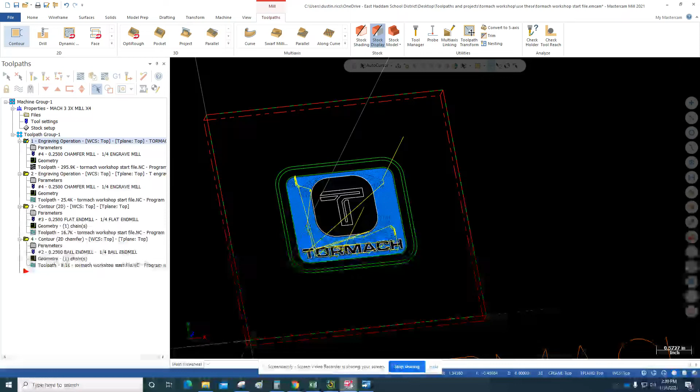All right, so in the first part of this video, we walked you through the four processes for creating the toolpath. Now we're going to show you how to verify it and how to post this file and turn it into an NC format so that we can bring that to the Tormach mill and run this part.

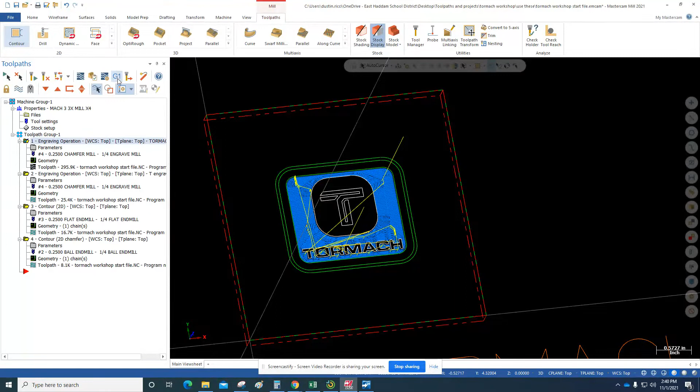Okay, so to verify that it ran correctly, it should cut and view the way that it's supposed to look when it's the finished part. So we're going to click up here where it says Toolpath Group 1. That selects all of our toolpaths, so it's going to verify all four of those. And we're going to go over here to verify our selected operations.

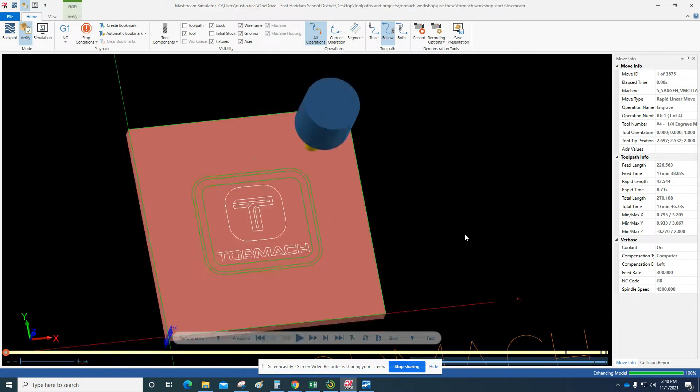By pushing in the middle scroll wheel on your mouse, pushing it straight down like a button, you can orbit this around so you can view it in the best way. And then hit play. You can slow it down a little bit.

So this is going to go through and take us through the engraving operation first. And a small step over here, so it takes a little bit of time.

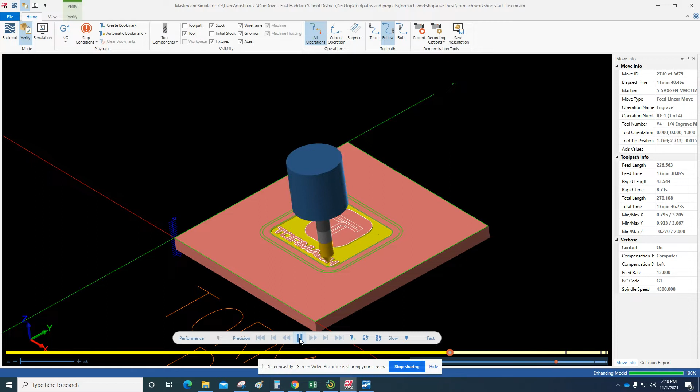Okay, it happens so fast, but it does show that we have our 80 thousandths thick tab. We have our cutout, which cleared through the material. And then we have our 2D chamfer toolpath that takes and puts that nice rounded edge. It's a 2D chamfer, but it put a nice little fillet in there for us with a ball end mill.

Okay, so that is what we want it to look like. That's what our part is supposed to look like. So that's great. Next thing we're going to do is post this so that we can bring it over using a thumb drive or a flash drive to the CNC machine.

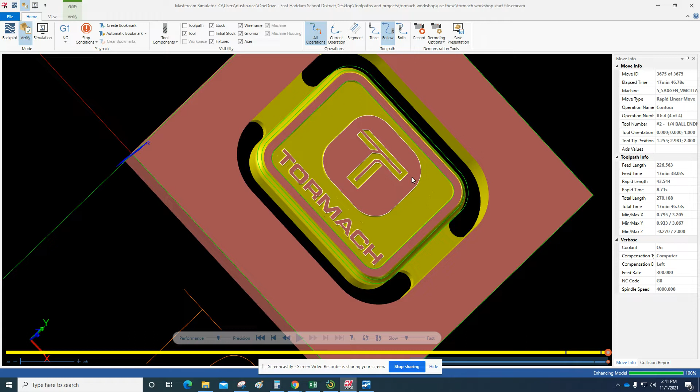So I can just close this window. I'm going to bring that back to my top. And then to post these operations, again, they're all selected. So I'm going to go over here and hit the G1, which is the post processor.

It's going to default to my Tormach mill, and all of my default settings are correct for that. I'm going to say OK.

Make sure you are selecting USB drive. And what we want to call this is Tormach Workshop, and put your name in there. Put your first name so that we know that we're getting the correct file.

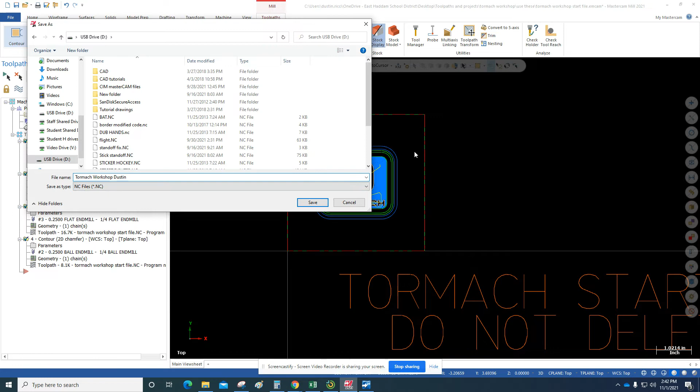And hit save. Okay, from there, we should get the G code to pop up. So we have our Tormach Workshop Dustin dot nc, numerical control, and it gives us all the information we need, all of our G code, all our machine codes. We're going to take this over to the Tormach, put it into Path Pilot, and start setting up our stock.